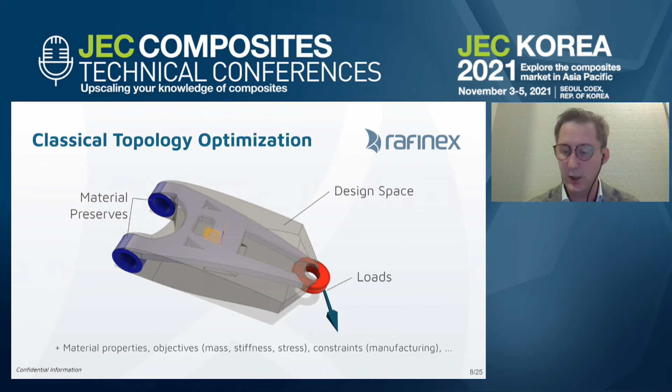So what is new or different with Rafinex, this new technology, and how does it differ? When it comes to topology optimization, you always have to say, these are the loads that my part will have to support. Here, exemplified by what we call a deterministic load vector, meaning the loads you define are exactly that, or you assume that in reality, they are exactly of that magnitude and exactly in that direction.

But the truth is that in reality, you have variability, meaning that in operation, you have manufacturing tolerances, you have mounting tolerances, maybe something gets mounted just a little bit off, or worst case, the end consumer doesn't use your product exactly the way that you intended it to be used, meaning that the loads or the requirements that the part sees in operation can fluctuate. Even if you know your conditions very well, they will still fluctuate around what you assumed, right?

And you can prescribe just how much deviation you want to consider and how likely these deviations are. So this is now, let's say, an augmented input to a topology optimization. But for the rest, everything stays the same.

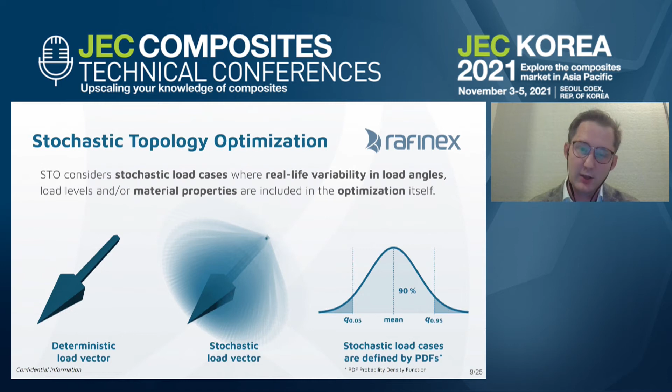And then the research that was done in ETH Zurich enabled us to bring computational times of stochastic topology optimization down from like 3-4 weeks to like 20 minutes for small parts. We can do whole car chassis in about 12 hours. So it really brought the technology to an industrial use case.

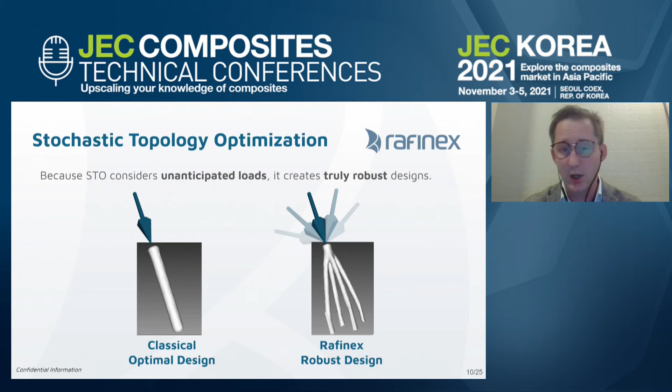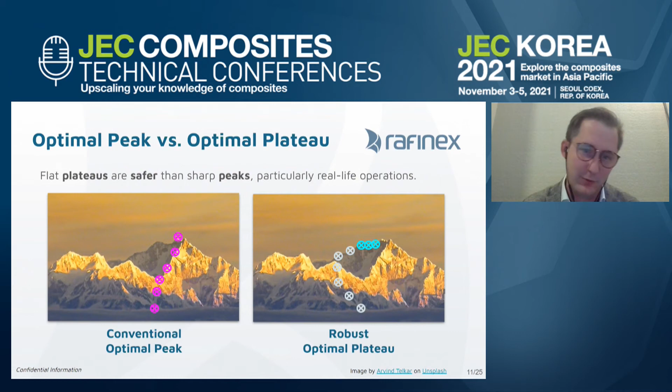Versus what the robust optimization does: it is not necessarily looking for a peak, but for a flat plateau. It's looking for the highest stable plateau it can find in the mountain range. The implication is that if something later on goes a little bit wrong in life or manufacturing, you stay on this plateau and you don't suddenly fall off the mountain because you just stepped off the peak. So that is the underlying technology and concepts. What are the technical advantages in industry and the impact that this can have on businesses?

First I want to say that we've deployed this technology for 2-3 years now in industry with automotive OEMs, but now we made this accessible through a self-service interface as well, and this launched recently. So this is a completely browser-based optimization. It's very light touch. You can even run it on your phone if you wanted to.

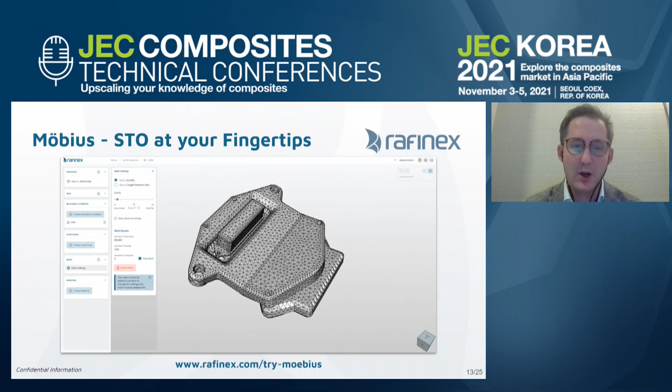So going back to robust designs, and this goes also back to us not being bionic. So what is this stochastic optimization creating?

3 minutes left, André. 3 minutes. Oh, okay. Yes. All right. Then I'm going to have to hurry.

So generally, these components are robust, so they make sense. If engineers look at them, they recognize a lot of common sense features. So we see shells, we see U and T channels, and this leads to the components generally being stiffer and having better eigenfrequencies.

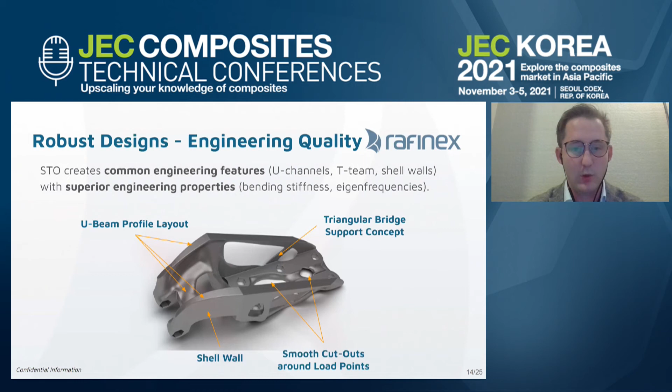So generally, the engineering quality that comes out of this optimizer is quite credible, and that makes sense. We can prove this, we can analyze this, and we can quantify this. So we can also show that these robust designs have better stress distribution and that they are quantitatively safer. So we can quantify how much safer they are, and then you can choose whether you keep this safety because you like it, or whether you're going to trade it in and start reducing weight because the safety level of your previous design was fine.

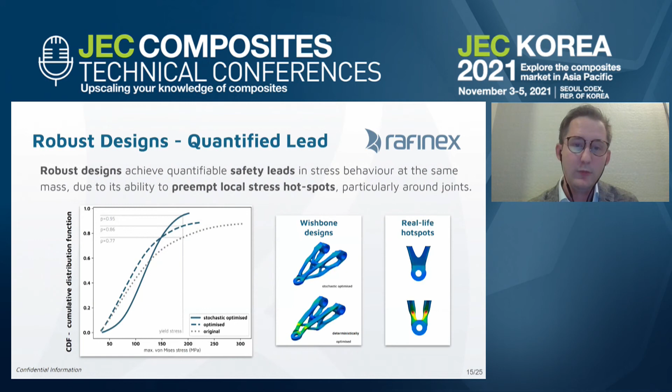How do we do this? Among other things, something that we are very proud of is that, for the specialists, the numerical people in the room, we are using adaptive meshing, meaning that our algorithm automatically optimizes the mesh resolution, the representation of the object during optimization, and this is how we achieve better speeds. This also contributes to why the parts have a better engineering quality, because we can get these better shapes optimized.

The business impact there is really that you can create higher performance products. They have a better safety behavior. And because they're more robust, sometimes you can use different materials, cheaper or more sustainable materials, so that you can maybe optimize your part, keep the performance the same, but then replace it with a better different material.

And as I said, because you can optimize with uncertain requirements, you can start the optimization much earlier in your design processes, maybe when not all requirements are known yet, but you can start optimizing and you can start making project management decisions. And typically these components or these parts won't radically change along their way.

Okay, so I have 1 minute left for how partners use this. So I'm going to go back to the UK Ascend consortium and how partners in that area are using it, and what we are developing with them.

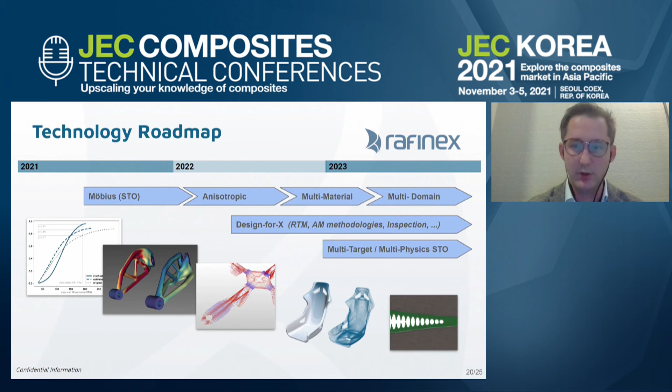So we're working on constraints for RTM, for specific AM, for inspection. So please give me parts that are compatible later on with my inspection machinery, and so on and so forth. So this is just the technology development on our end. There is a company within that consortium called FAR UK. They are a composite design and manufacturing company in the UK.

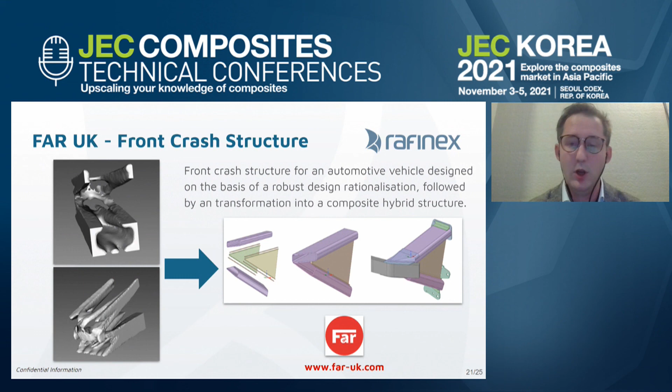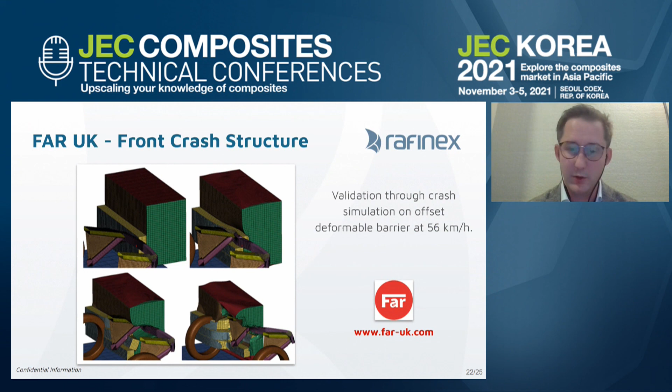So they've been using our stuff now to start doing crash, to develop early concept stages that they then turned into front crash structures, which they then also tested dynamically, and it's being built now as well. So FAR UK, I can only recommend for their whole package of in-house knowledge, going from design over simulation and analysis all the way to manufacturing for composite parts, composite platforms.

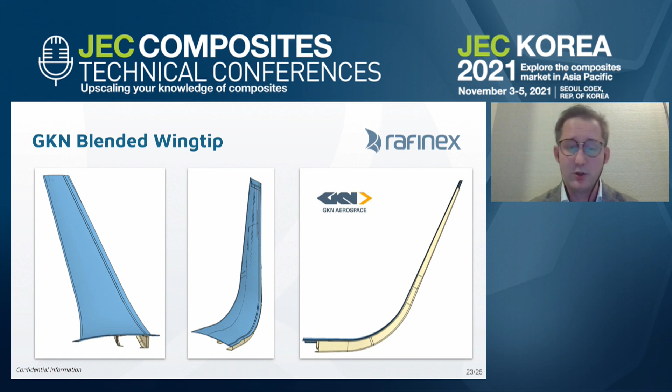And then finally, what we are working on with GKN in this as well is a blended wingtip, which is a very high aspect ratio component for us. This is a to-be RTM component destined for the markets of mid-sized aircraft or eVTOL, so really large production. So here we are working with them on optimization techniques which create robust parts, which are composites and manufacturable at these higher rates. And that's it.